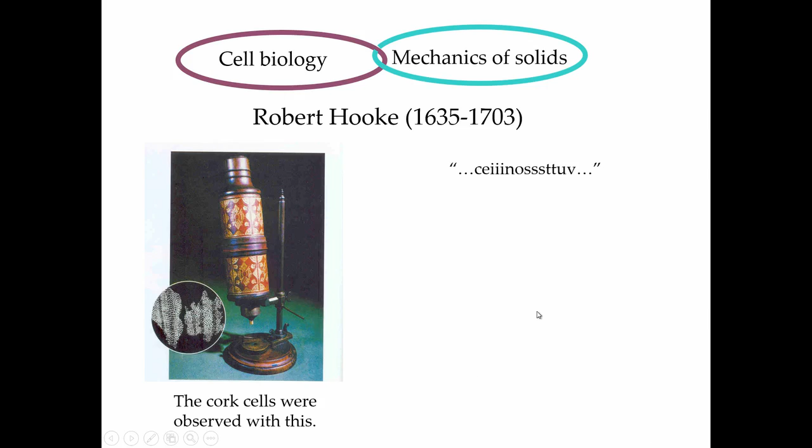So, I always start with this microscope image to say that it was Robert Hooke, one of the pioneers in two fields, cell biology and mechanics of solids, because the Hooke's law that we talk about today is credited to Robert Hooke, who said, using an anagram in Latin, ut tensio sic vis, which means the force varies as the stretch. That is what he had observed.

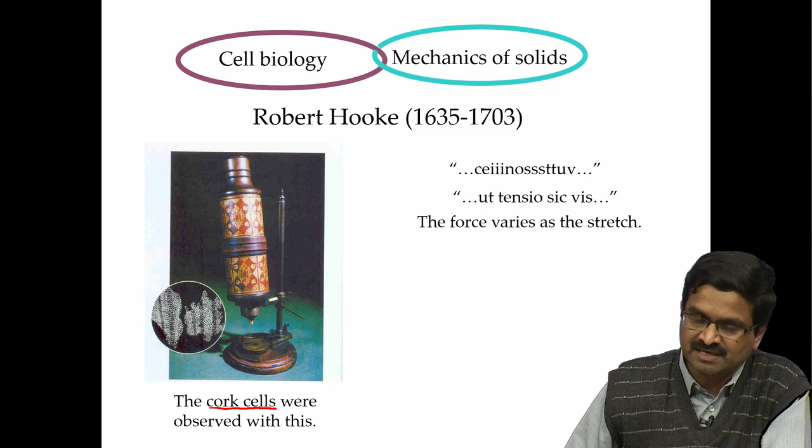He also had observed the cork cells under the microscope and realized that living organisms are made of building blocks which are cells. As we know, biological cells are of the micron size. So, cell biology and mechanics were linked at their very inception.

It is actually quite interesting today when mechanical engineers work on biological cells or biology. It is not at all surprising, because the very originator, in a way, of both fields, cell biology and mechanics, Robert Hooke had done that, one man.

In fact, this year 1949-1950 is interesting, because just a few years later he discovered, along with Jim Watson, the double helix structure. He was interested in mechanics of cells so long ago, and there are papers that go back to 1938 and so forth as well. So, Crick's description of a biological cell is important.

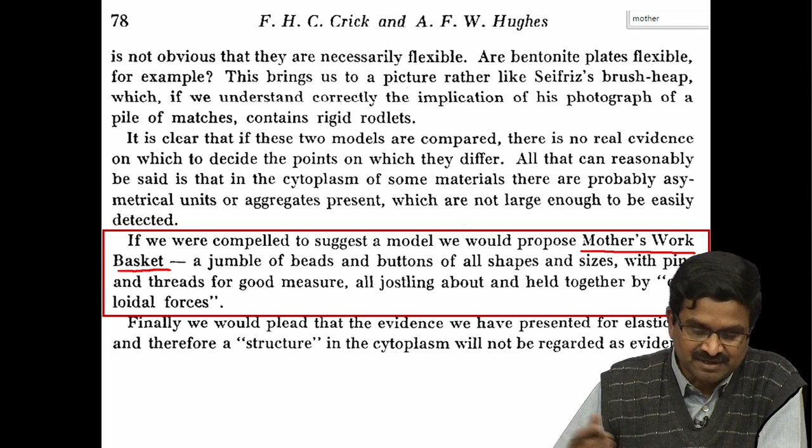As you listen to a mechanical engineer talking about biological cells, he talked about a cell as if it is a mother's work basket. In his time, I guess mothers used to sew things, and there were jumbles of beads and buttons of all shapes and sizes, and there are pins, and there are threads and so forth. They are all jostling about inside the cell due to colloidal forces. He himself put it under quotes.

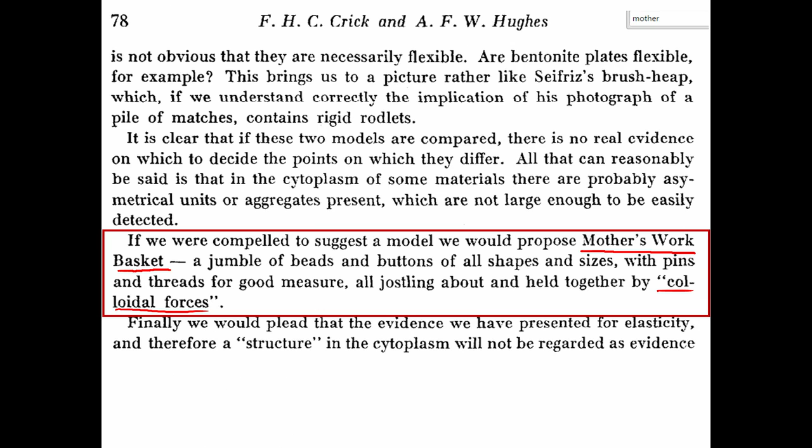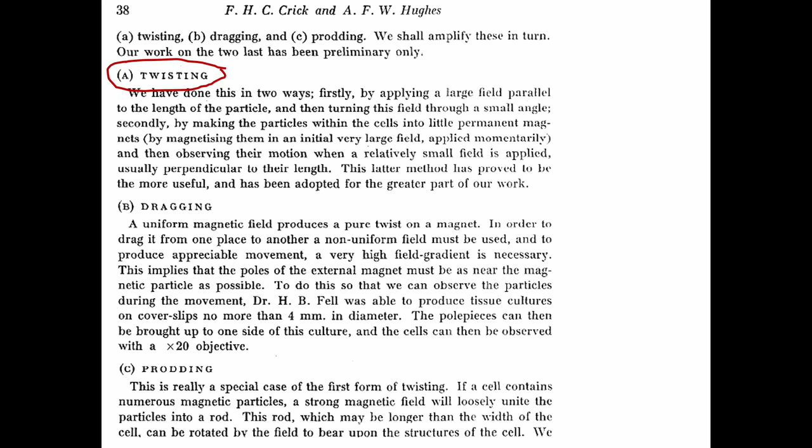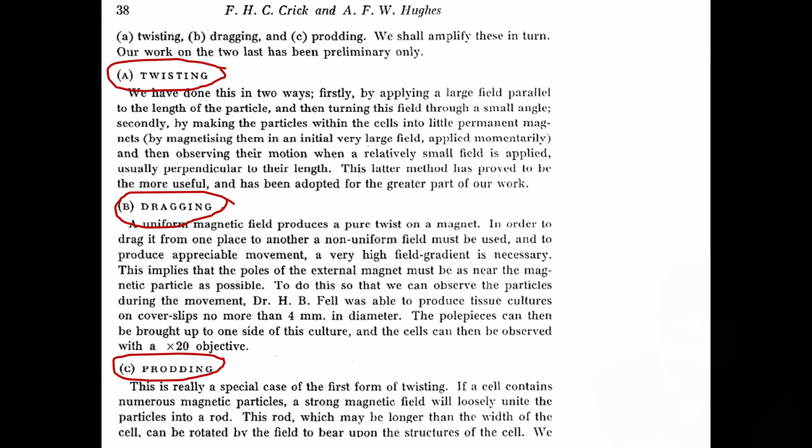So, basically a cell is a complicated thing, and understanding it from a mechanical viewpoint is what many people are doing under the name of biomechanics of the cell or mechanobiology of the cell. What is of importance to us now is that Crick had devised instruments for twisting, dragging and prodding cells in order to understand them. These are excerpts taken from his paper.

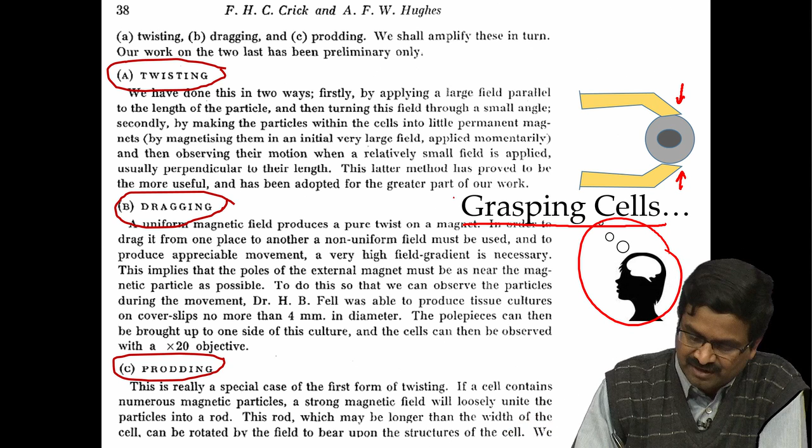So, when we say grasping cells, we literally mean that we want to grasp it like a gripper, but what we actually mean is thinking about cells and understanding how cells behave from the mechanical viewpoint. Both are there in the word grasp. The pun is intended.

When you do these grippers, you do not use any other field, meaning that there is no electrical, magnetic. Crick had used magneto-twisting cytometry, as it is called today. So, you do not have any other energy field affecting the cells, because what all things affect a cell is not known. People are still trying to figure it out.

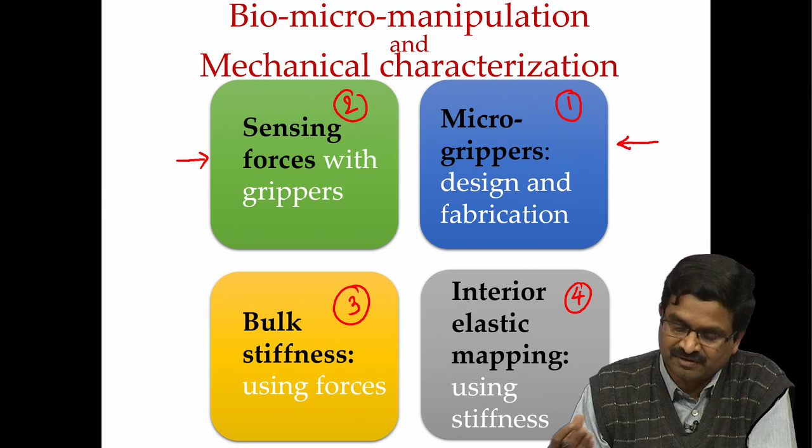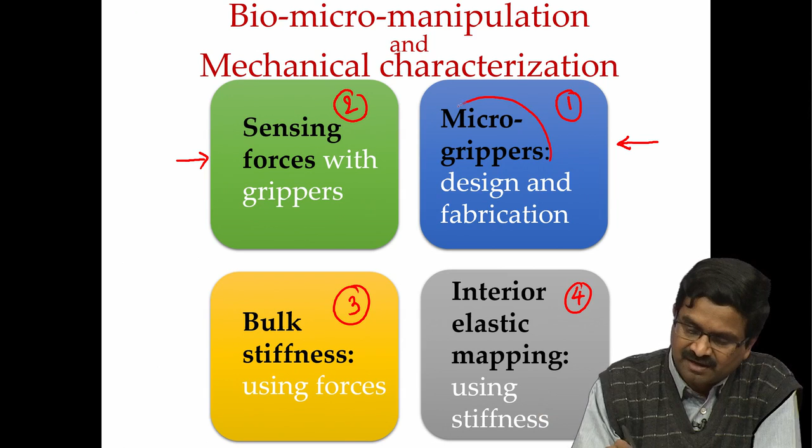So, if you have a mechanical one, you do not have interference with anything, it is not thermal. If you use laser tweezers, there could be temperature changes in the cell, that might also make the cell behave differently. So, here we are using purely mechanical means and in the water environment of the cells.

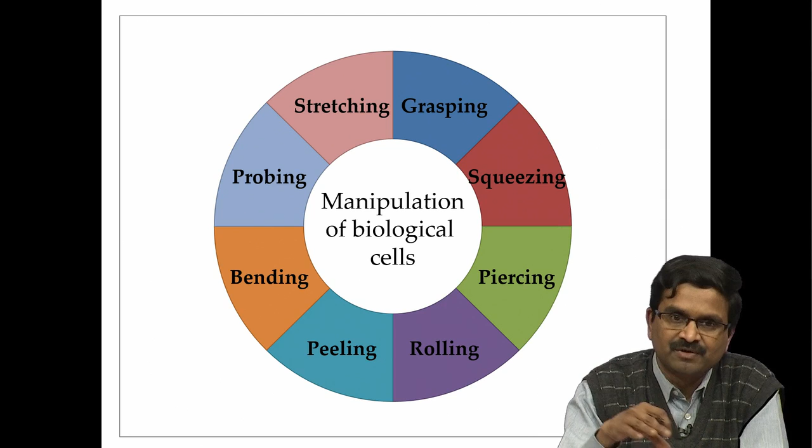So, without going into the details, first I am going to show you a few movies or video clippings of doing all kinds of these manipulations: grasping, squeezing, piercing, rolling, peeling, bending, probing, stretching. So, all the things, just to get an appreciation for this. Again, this lecture, all the case study lectures have a lot more information in the slides than what we will have time to discuss. Just let us see what compliant mechanisms can do.

First is grasp. What you see here is a compliant mechanism. There are a number of cells here, these are MCF7 cells, these are mammary gland cancer cells. There is a small pipette which is used only to position the cell and does not do anything. There is a dark shade here, that is the probe that is actually going to push this here. This is fixed here as well as there, and this is made of SU8 polymer,

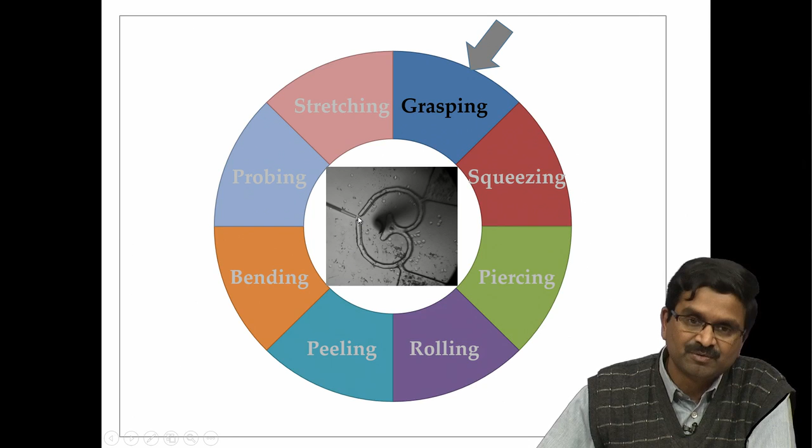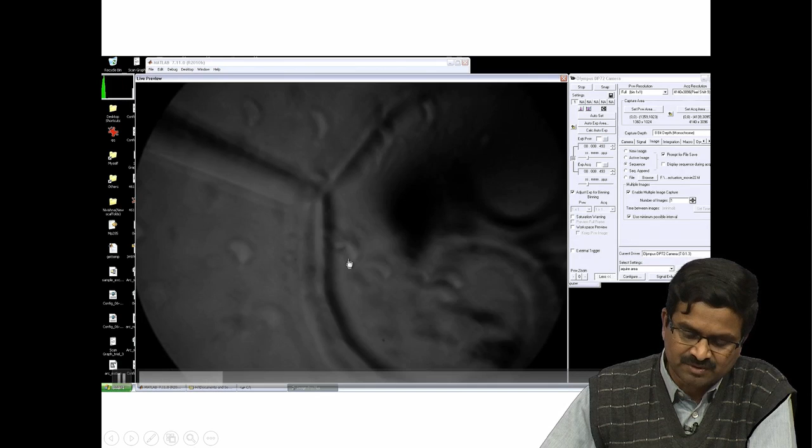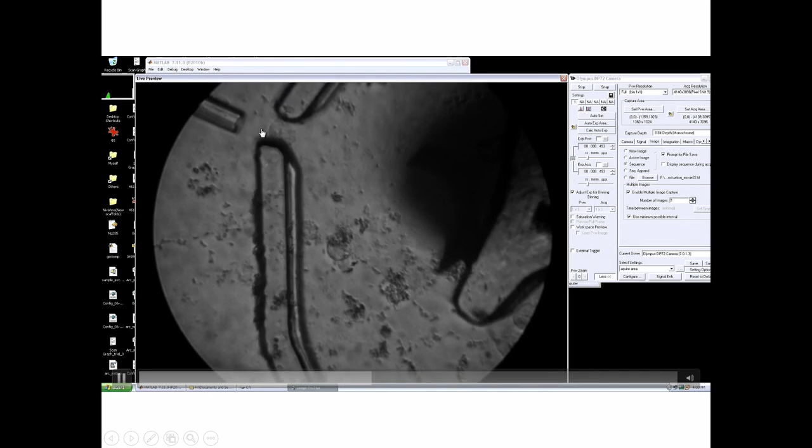and it can hold this single cell, and this dimension is about 5 or 7 microns. The cell itself will be about the same size, so about 10 microns in size. You can see that in the movie. So, this is just positioning it, and this one is holding it, and you will see when it comes into focus the cell actually being grasped and squeezed a little bit also. So, that is where the cell is. This is only to position, and it is able to grasp it with this one input. Okay. So, we can do that now with compliant mechanisms.

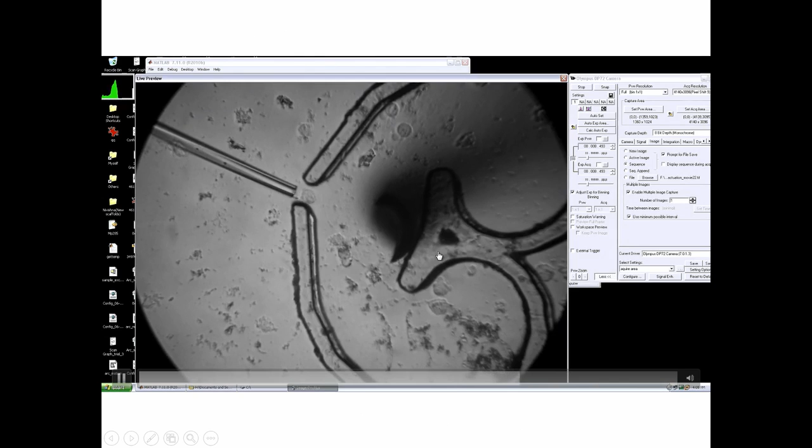And next thing is squeezing. The squeezing is really squeezing a lot, as you will see, and this is also done with compliant grippers, where you are going to see the jaws. It actually squeezes it and then lets it relax in real time. So, it takes a while. So, you can see it when it is played again. When you apply force somewhere else, this compliant mechanism kind of squeezes it.

So, yes, it should play. Okay, let us do this. I think it had to go back. Yeah, it just squeezes and then it just recovers and stays there.

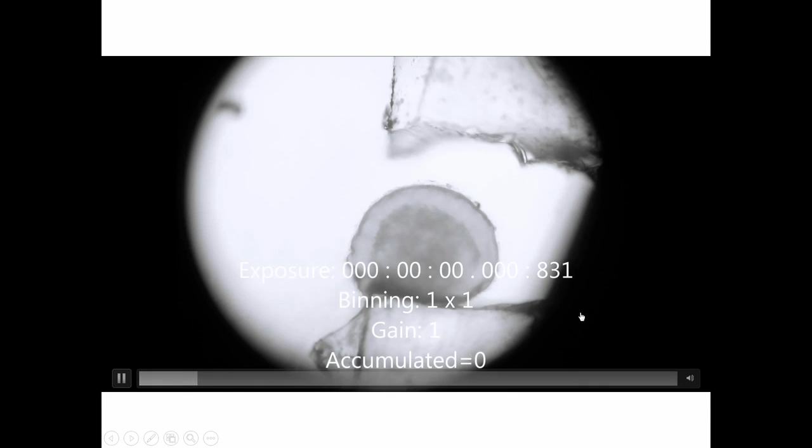Okay. And you can also pierce and inject things into it. Here we are just calling it piercing because we are not injecting anything into the cell, just to show that we can actually do this. Here, in fact, it is a zebrafish embryo, but we can also do single cells. With a pipette we are piercing it, and a compliant mechanism is holding it in place while it is being done.

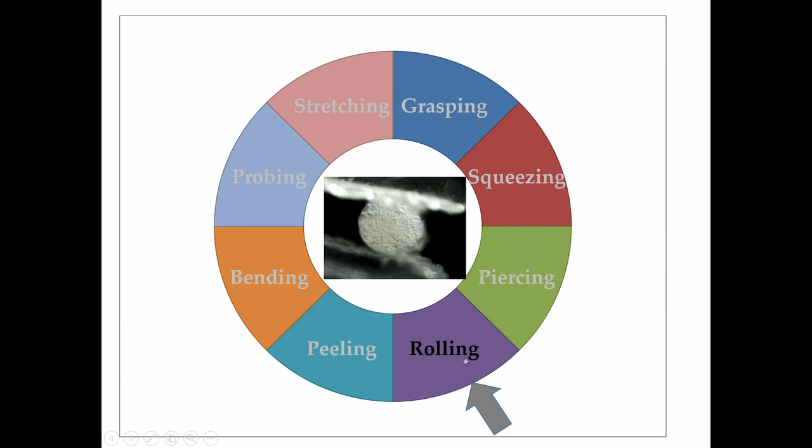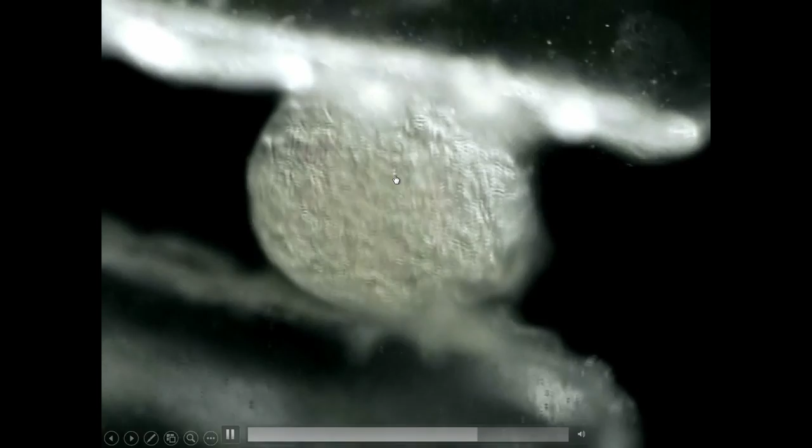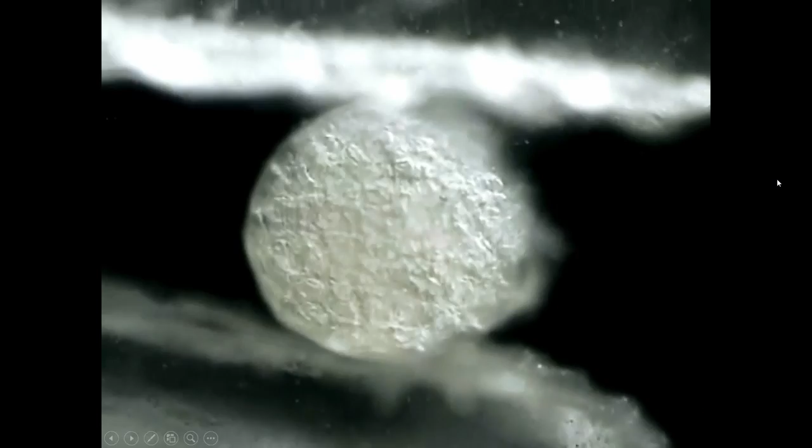And we can also roll a cell, as will be seen in this next movie. So, you can actually make it roll as if it is between your fingers, and a number of mechanisms were designed recently. Also one I showed in one of the previous lectures. You can grasp and roll using one single input or two inputs that are coordinated,

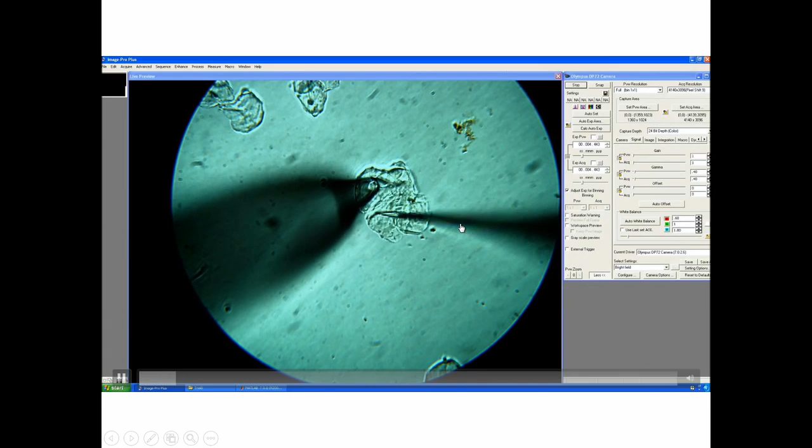and you can peel a cell. This is a particular special type of cell where you can peel them off their substrate, and here you do not see the compliant mechanism, but what you see are these two probes to which a micronewton force sensor was attached, which we will discuss in another case study. So, it is more of a manipulation capability with the probes, and those probes are attached to a compliant mechanism that measures forces.

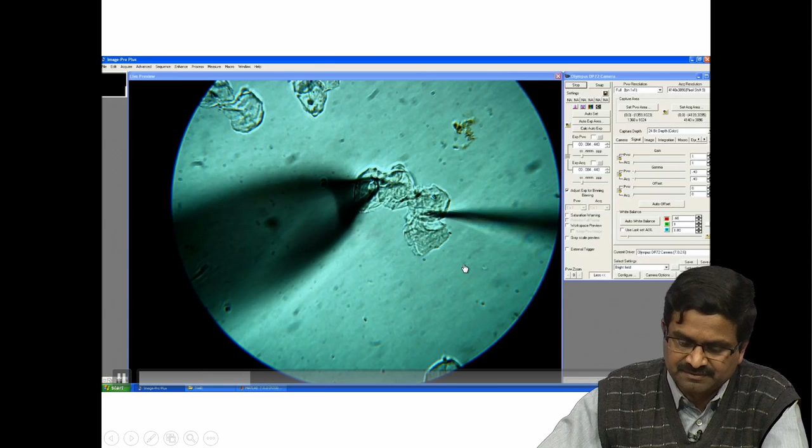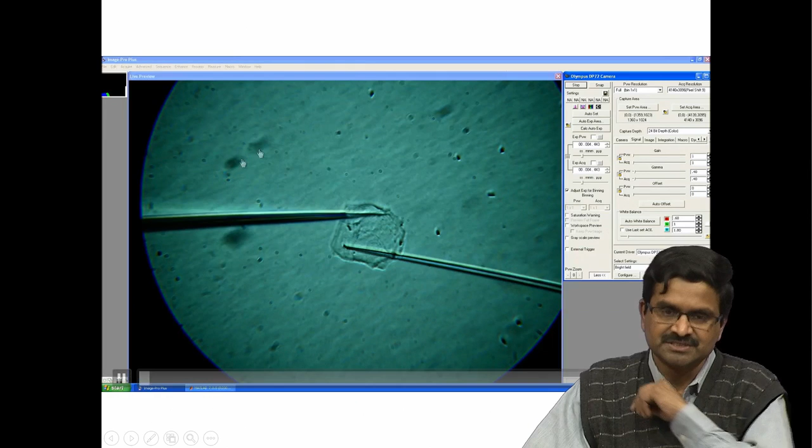You can peel one cell which is attached to another one by just tearing them apart. And you can also bend a cell. For most of the cells, bending of a cell does not make a whole lot of sense, but for some cells it does matter. As we see in this video, these are a very special type of cells where they are flat and you can actually bend it here.

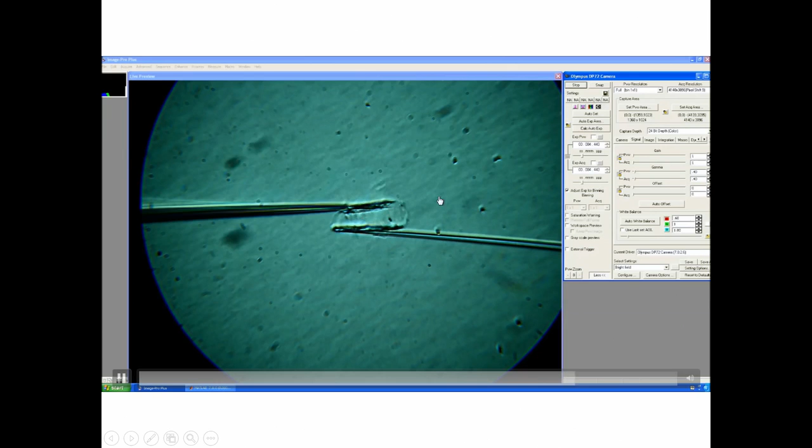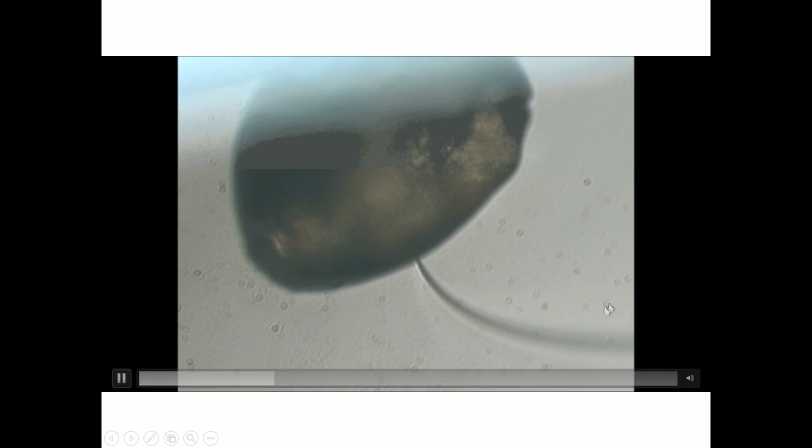So, you can see this with probes; again, probes are attached to the force sensors, which are again compliant mechanisms. So, it is bent now, and you can probe it. Here you can see this needle that is probing is very flexible, it is bending so much more compared to the cell itself, and all these forces can be measured. And stretching we had already seen.

One point to notice here is that the material of this mechanism and the one inside are different. The reason is that if you use lithography to make the micro compliant mechanism, which is supposed to grasp something and then stretch, you need to have very tiny beams. With those tiny beams, making something this big is not possible. The process that makes a big compliant mechanism cannot make this.

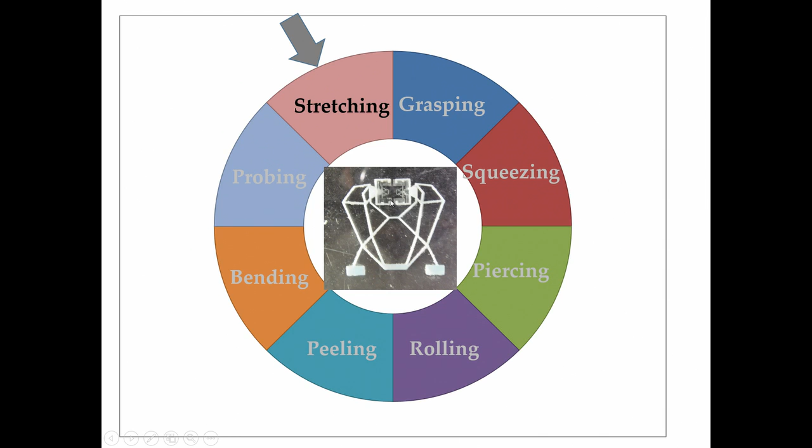So, what we have ended up doing is this composite compliant mechanism, so to speak, composite meaning the two of them are together, not that it is made of composite materials. We have 3D printed this white one, and this small one is made of SU-8, lithographically made and put into that. And this video we have seen earlier, how we can use a single input to open things up here, put a little thing there, grab it and also stretch it. So, this video shows that.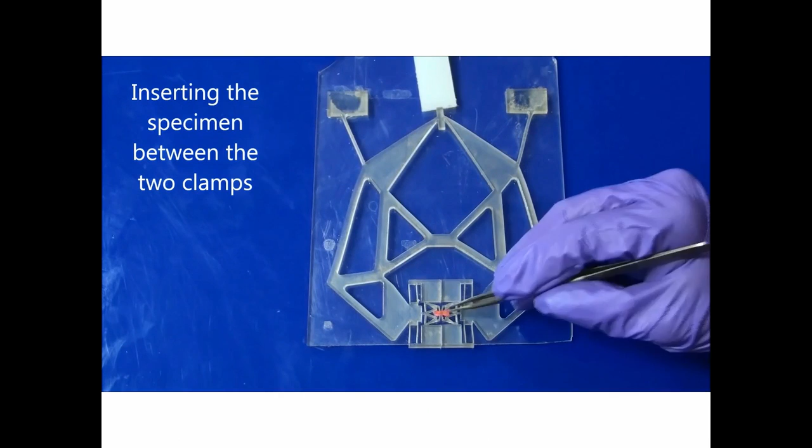This is also a contact-aided compliant mechanism; when these things touch, that is when they open up. It is all one single piece. Now, you put something, remove the force, then it will hold it. After that, when you press it, it is going to actually stretch it, as you can see. Once it is placed, when you pull it the other way, this starts stretching. Things come together when you push, and when you pull they go apart. So, you can grab something and then stretch. The micro version of this, as I said, has to be made in two parts.

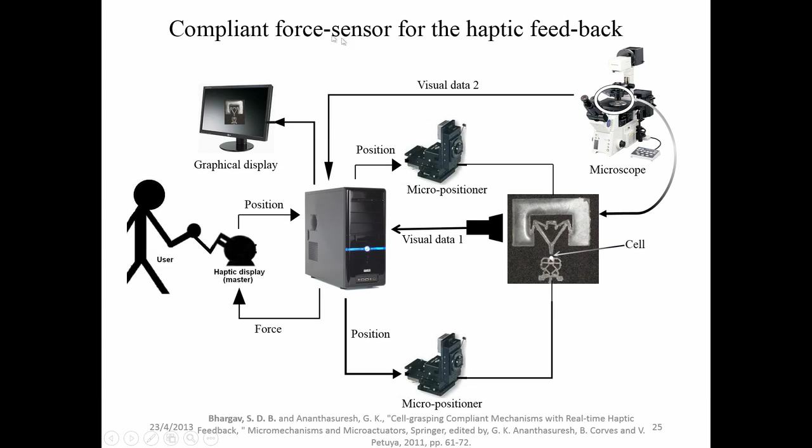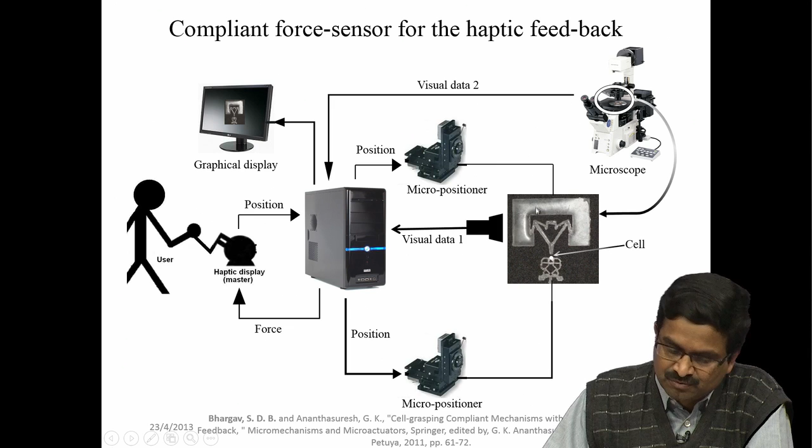Okay. Force sensing can also be done with compliant mechanisms, not only manipulation, which we will discuss in another lecture. In fact, this is the force sensor compliant mechanism. This is a compliant mechanism that grabs the cell, and whatever little force is there, it will amplify the displacement over there, which you measure using a digital microscope. This is a setup in our laboratory. This digital microscope measures the output displacement and gives us the force, while compliant mechanisms are manipulating the biological cell.

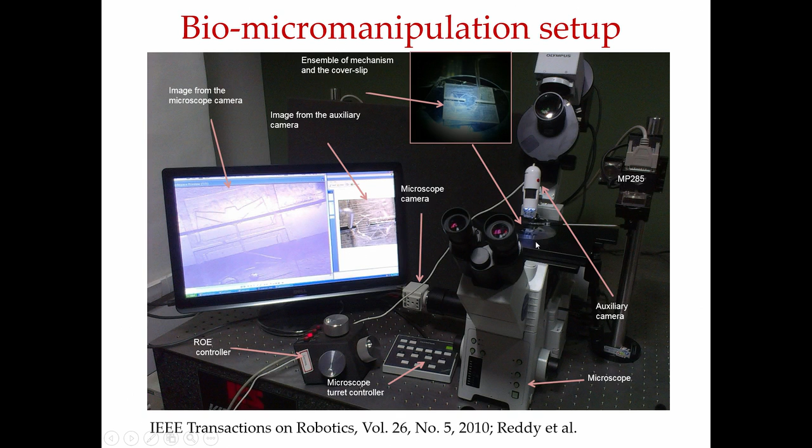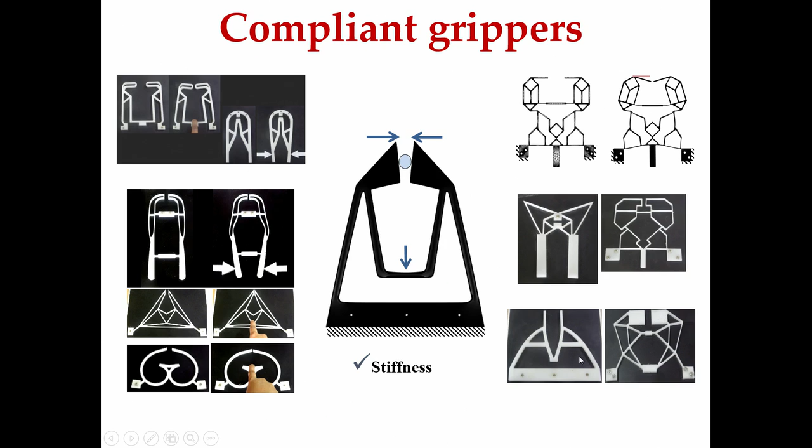In this empty space we put a DACM, so we can measure the force as well, reducing the stiffness down to the stiffness of the cell, which can vary anywhere from 1 newton per meter all the way to 1 millinewton per meter. So, it is a very low stiffness that biological cells have.

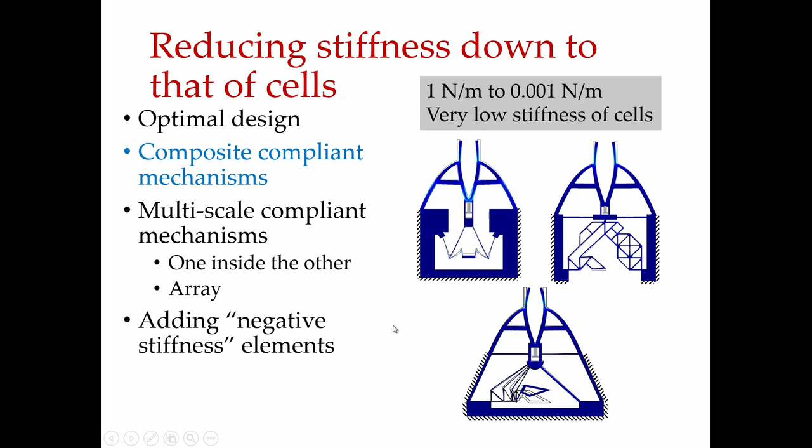So, if you want to handle them gently without causing damage to them, you have to have this range of stiffness to your mechanisms also. That is why a lot of tricks were played out. One is just optimal design: first you make optimization, topology, shape or whatever, and then composite, you put one inside the other, and occasionally we had tried to add negative stiffness elements. By that what I mean, I will show you a picture later.

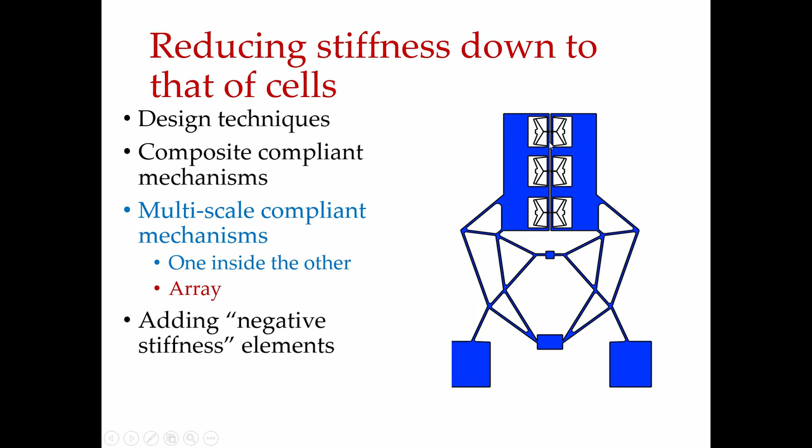So, one inside the other, as we just saw, definitely makes a lot of sense, and we can put an array of them. So, not one, many cells can be grasped at the same time. Negative stiffness: we have talked about bistable elements. Bistable elements over a small range have negative stiffness.

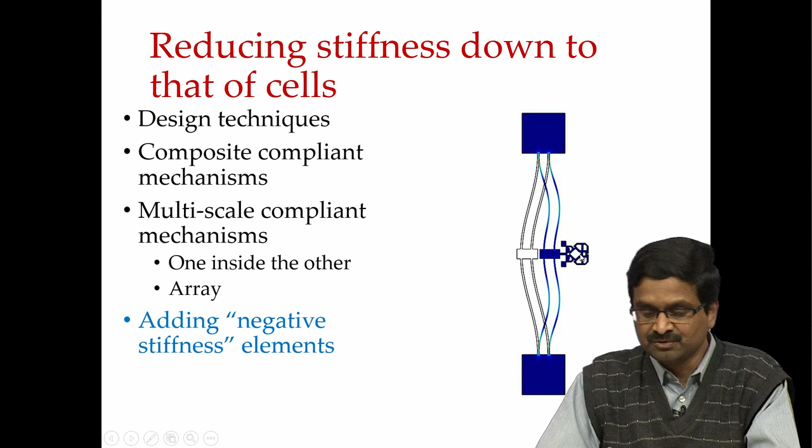If we attach that preloaded along with the gripper, then the gripper overall has some positive stiffness, this has negative stiffness over a small range. You put them in parallel, overall the stiffness would reduce. That is the idea, we will reduce it by even an order of magnitude, to get down to that level.

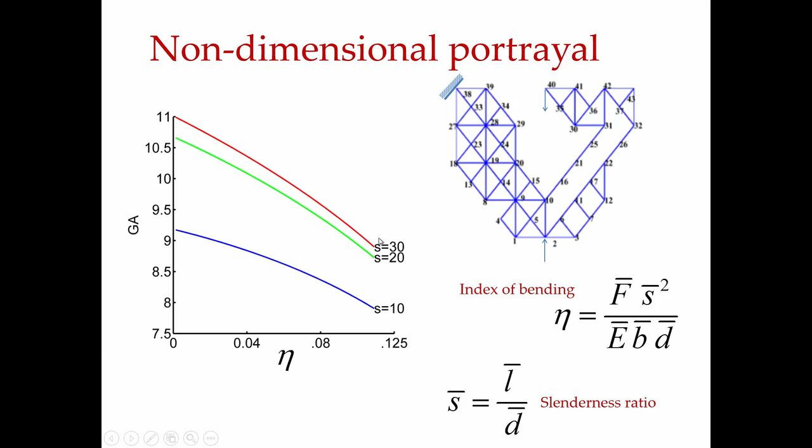And we also use these non-dimensional maps to understand the capability of geometric advantage, mechanical advantage, the force required, stresses and so forth. And sometimes we can use these maps to decide the size, as we had discussed once. So, what should be the size of this? You have the characteristic length L, let us say from here to here; in this case it turned out to be 640 microns based on your fabrication capability.

This is the thickness, B in this case is out-of-plane thickness, D is in-plane width, that is 5 microns. Somebody says with fabrication they can only make 5 micron beams, we can put that. If you want to measure 1 nanonewton force, from this map you can get this eta, and assume in this case it is SU8 material, 4 gigapascal Young's modulus.

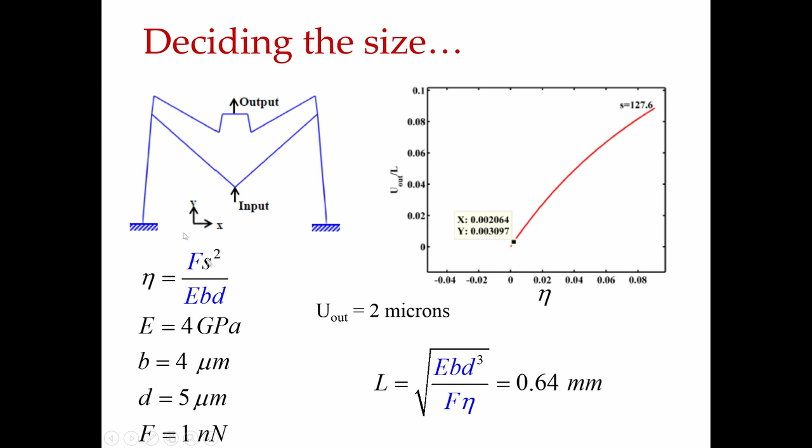If you want at least 2 microns to see the displacement under a microscope, since smaller than that is difficult, 1 nanonewton giving an output displacement of 2 microns says the size should be 640 microns. So, accordingly you can design. And putting one inside the other, we already talked about, where you have one mechanism that gives the parallel jaw motion and within that we put 2 DACMs, and this tiny space is where the cell is going to go. These beams are only 5 microns wide, and the cell is also a few microns.

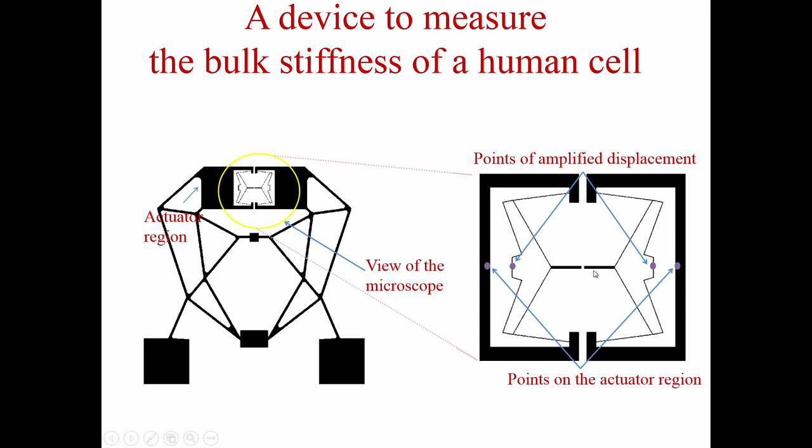And this big mechanism is 10 millimeters by 10 millimeters, within that is only about 1.7 by 1.7, so about a 2 millimeter thing, and these things are very small and they do not break. We made sure that stresses are small, and the range of displacement here is only to squeeze by about 10 microns. There is a process that was developed that is also very important, and the material we are using here is SU8, and there are a lot more difficulties. It is not just designing the compliant mechanism.

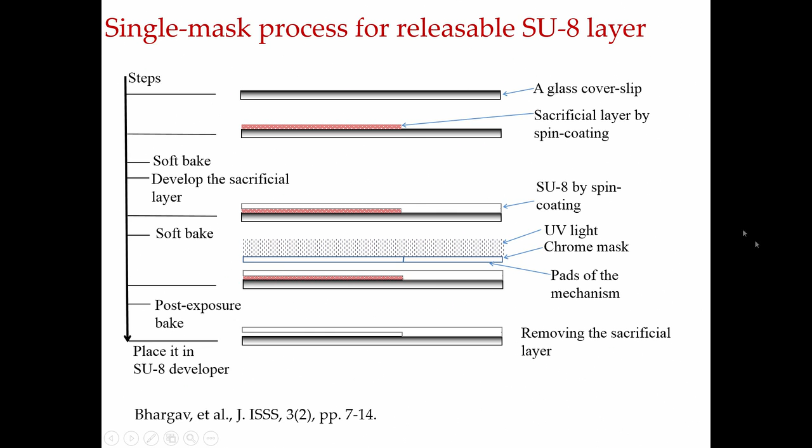When you try to put it in water, sometimes the buoyancy force makes them go up while the cells are sitting there. So, we have to play with a lot of parameters even in fabrication to make this. Finally, when we do that, we have the mechanism and this little mechanism over there, that is where the cell would go and be grasped.

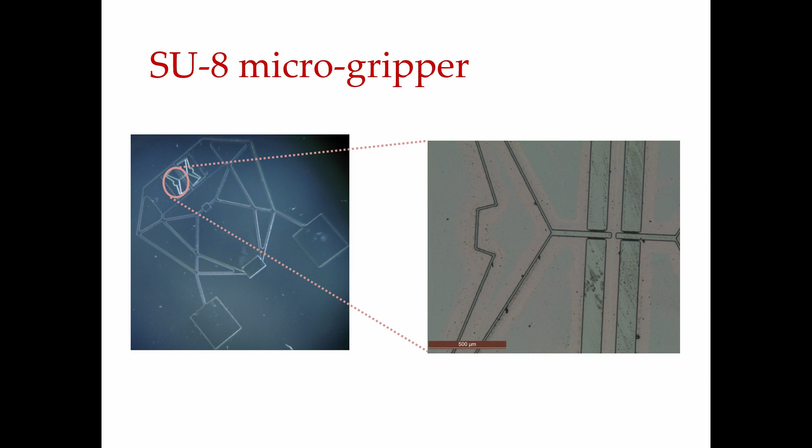So, a compliant mechanism can be used to manipulate a biological cell in many ways, whatever you think of, including tearing; you can actually tear a cell apart with mechanical tools. One can use just beams, but compliant mechanisms themselves are made up of beam segments. So, we have to arrange them so that the manipulation we are interested in is obtained, and in the next case study we will see how compliant mechanisms can be used to measure force as well.